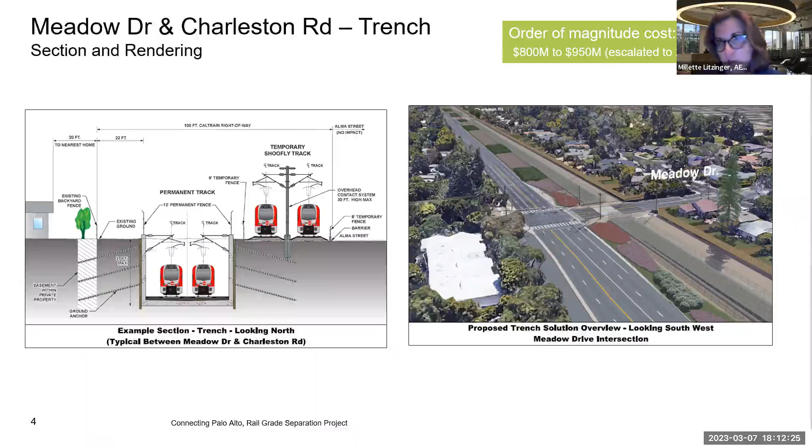You can see that in the rendering on the right side of the page. Because of those ground anchors for the retaining walls, the landscaping modeled in this area depicts plants with shallow roots, since we couldn't put trees in that area due to the ground anchors. The order of magnitude cost for the trench is $800 to $950 million, in 2025 dollars. The next slide is the same rendering looking south towards Meadow Drive, just at a larger scale so you can see more detail.

Did you say 950 million? Yes, that was the high end of our range of costs. Okay, thank you.

Let's move on to the hybrid. Hybrid is a term we use to indicate when a railroad is partially raised and the roadway is partially lowered. The railroad tracks will be approximately 15 feet above Meadow and Charleston, while Meadow and Charleston will be lowered about 6 feet. The railroad will begin rising near El Verano Avenue, remain raised over Meadow and Charleston, and return to the existing track elevation north of Verney Avenue.

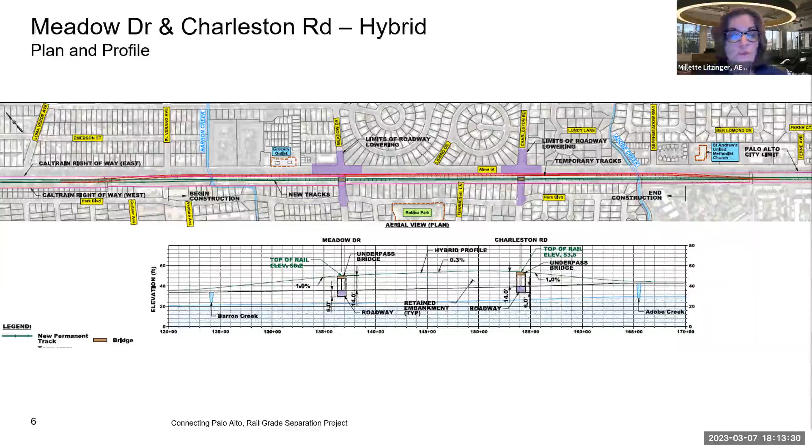Will the high-speed rail be compatible with that, raising it? Yes, high-speed rail can go on an elevated structure as well as a lowered one.

This next slide is a plan view of what would specifically happen at Meadow Drive. In the interest of keeping our presentation short tonight, I'm just talking about what happens at Meadow - there would be similar impacts at Charleston. In this exhibit, Meadow runs up and down, and the purple indicates areas where the streets will be lowered. Meadow will be lowered roughly between Park Boulevard and east of Alma Street, and Alma Street will also need to be lowered. The impacts outlined for Meadow Drive are very similar for Charleston Road - the lowering of both is approximately 6 feet.

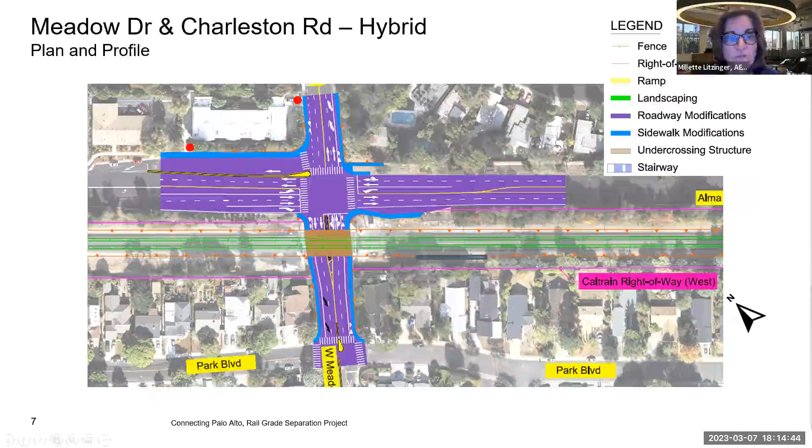We'll move on to the section drawing and rendering. This is a sample cross section between Meadow and Charleston looking north. The track is slightly elevated, and we show the temporary track required to provide Caltrain service during construction.

In the rendering on the right side, the tracks are partially elevated and the roadway is partially lowered. This rendering of Charleston Road illustrates the retaining wall to elevate the railroad and lower Charleston as well as Alma. Both would have to be lowered to some extent to get underneath the railroad tracks. Is it very similar to Fifth Avenue in Redwood City?

Fifth Avenue in Redwood City - yeah, it would be somewhat similar. Fifth Avenue, I think, is a fully lowered road, so it'd be similar, but not quite the same. Maybe a better example would be in San Carlos, some of those up at Holly Street - probably more similar.

I don't understand where the shoofly tracks would go in any of these. Is there room for shoofly tracks? Yes, we have to put it on one side or the other of where it exists today, so we can build the new tracks near where they are now. It would take up a portion of Alma Street.

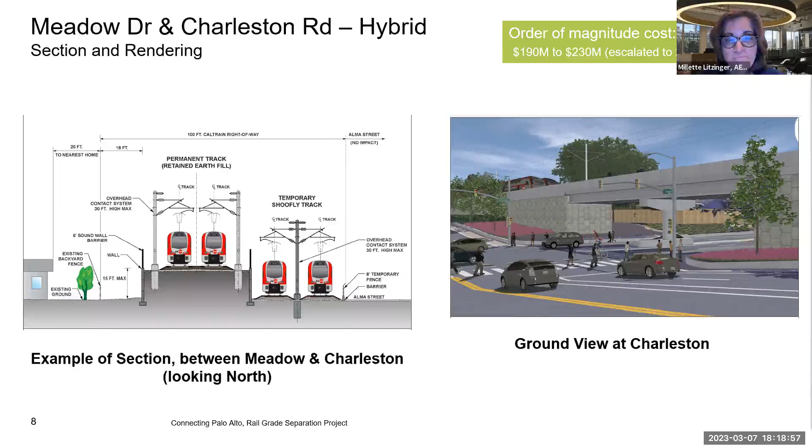I'll move on to the last alternative, the Meadow Drive underpass. In this alternative, the tracks in Alma Street remain at their existing elevation while Meadow is lowered just west of Park Boulevard to Emerson while passing under the tracks and Alma. There's a separated 20-foot wide two-way ped bike path on the south side of Meadow, shown in pink. Similar to the other alternatives, the purple area indicates where the roadway is being modified.

The bike path passes under the tracks and Alma, and there are crosswalks on Meadow provided at Second and Emerson.

There are some turning movements that won't be allowed with this alternative due to geometry restrictions. Vehicles on Meadow will not be able to access southbound Alma. Northbound vehicles on Alma can access Meadow, but they will have to travel about 600 feet north to Alma Village Circle to make a U-turn, then travel back south to make a left or right turn onto Meadow at the signalized T intersection in the underpass. Due to the proximity of Alma to the railroad, the U-turn radius is relatively tight and trucks would be prohibited from this movement.

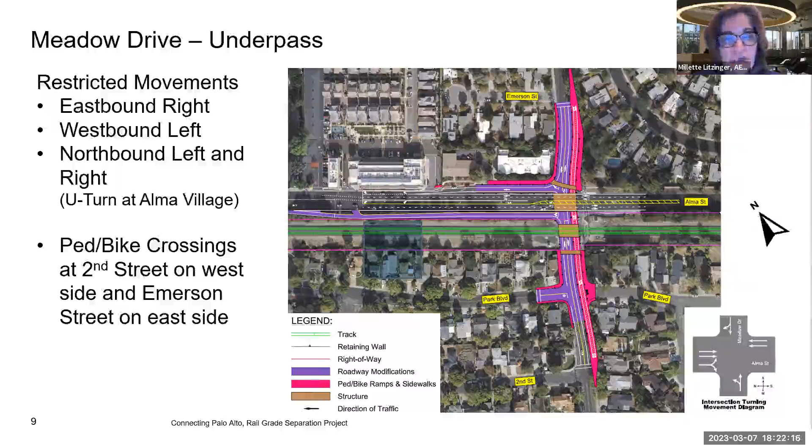I think let's move on then to the rendering here on the next slide. The image on the left is looking north along Alma towards Meadow. You can see the ramp connection from southbound Alma to Meadow, shown on the left side of Alma, and the ramp connection from Meadow to northbound Alma is shown on the right.

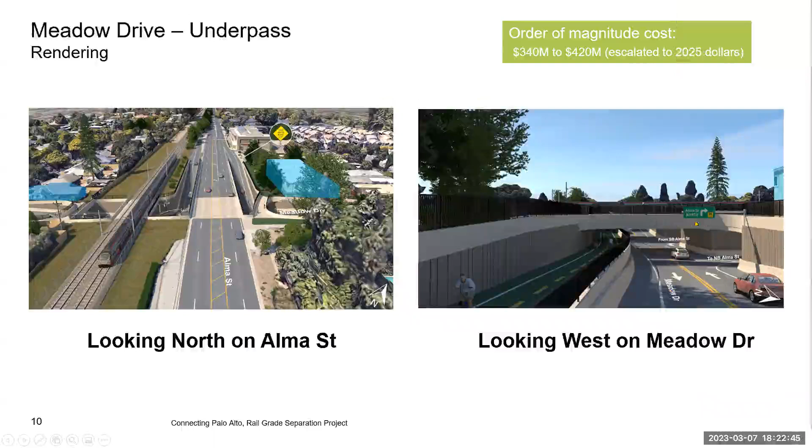The image on the right is looking west along Meadow. The separated bike path can be seen on the left behind the railing, and the right turn onto northbound Alma can be seen on the right side of this rendering.

The order of magnitude cost for the underpass is $340 to $420 million, in 2025.

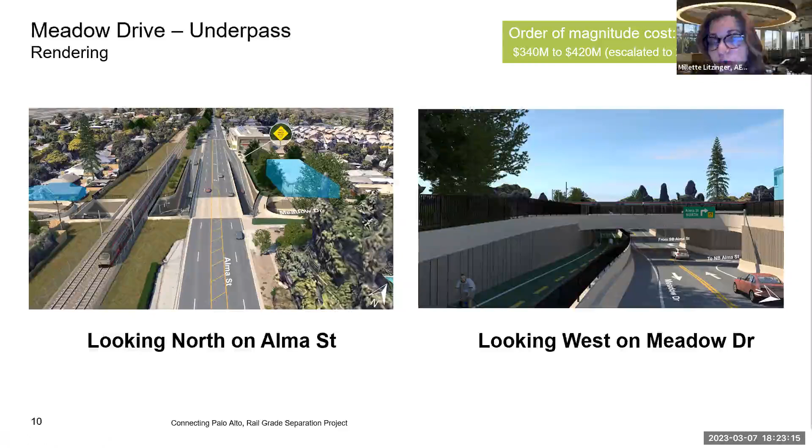And that's a different cost than the trench? Pardon me? That's a different cost than the trench? Yes, they all have different costs. Each alternative, trench, hybrid, and the underpass, are all different costs.

And is this underpass quote just for Meadow, or is that for the two of them? It's for the two of them. Okay, the cost is for both or individually? For both.

Okay, I think I'll pass it to Ripon then. So finally, right now the status is that we have narrowed down these alternatives to 3 alternatives in consideration for Meadow and Charleston, and that's hybrid, trench, and underpass alternatives. Our stakeholders, including our pedestrian and bike advisory committee, as well as school district and other stakeholders, have recommended us to look into some refinements and address some of these issues that they brought up to us.

So we are conducting some additional studies and refinements of the alternatives at this time, which would help the rail committee in narrowing further those alternatives for the selection of the preferred alternatives. Currently we are doing some additional geotechnical studies, some additional cost estimation, as well as some refinement of the alternatives to address bike and pedestrian movements and other concerns that were brought up from our stakeholders.

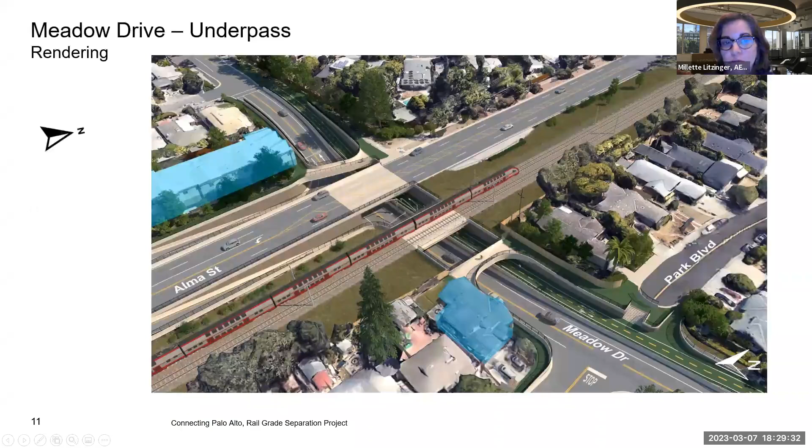Caltrain's minimum or maximum allowed grade is 1%, so that is what we generally try to follow, though the trench looks like it's 2%. Yes, it would require a design exception. We want to go back to that. Thanks, Peter. And that's assuming 110 miles an hour up the peninsula.

The high-speed rail, I think it might be more the freight that might have the problem with the 2% grade. Yes, it is generally that. So that's one of the many design criteria that we've identified as differentiators between the alternatives. For the trench, they would have to request an exception to the 2% grade, which could be challenging. You do have to show a significant hardship in order for Caltrain to consider it.

And it does take a while, so that's a challenge of this alternative. Some people would view that as a con, or it's a challenge you'd have to overcome to get this alternative approved. But 110 miles is the maximum speed. That's correct. Yes, go ahead, Peter. Yeah, the high-speed rail is designed for 110, that's correct.

Do you have any estimates of the duration of the construction projects to implement these three alternatives? Yes, we did, and I don't have those at my fingertips, but we have some really nice fact sheets for each of these alternatives on the Connecting Palo Alto website. It lists the approximate duration of construction for each of them. They're in the neighborhood of 1 to 3 years, depending on the alternative.

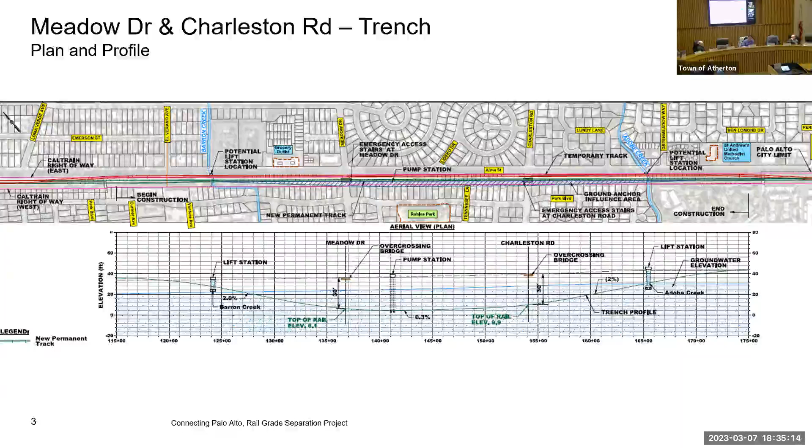Ripon, is there any decision for Palo Alto Avenue in terms of grade separating that, or is it still kind of waiting until the Palo Alto Council considers what to do around downtown? So currently the project is on hold for different reasons, including one being the downtown coordinated area plan. So at this time, that project is on hold.

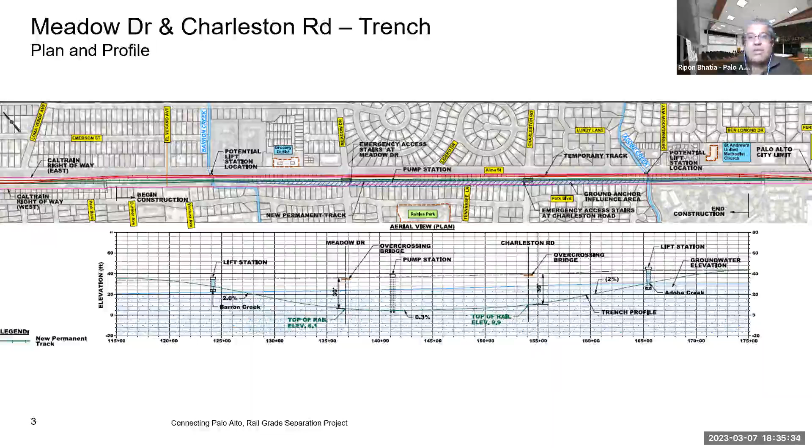Okay, can Millette mention the Menlo Park crossings, or were you planning on doing that, Millette? Well, I was planning on doing that. But Peter is probably better, since I think Peter is the consultant at AECOM for Menlo Park's rail plans. But I'm not sure if it's fair to ask Peter to present that since we didn't prepare him for it. But I can give a summary if Peter's willing to stay around - I'll move that item to the next one. Why don't we move to public comment, since we're done with the questions.

So Mr. Brandt, did you have a comment or question? Yeah, I do. I just wanted to make some comments.

High Speed Rail Authority is planning to do quad gates on all 70 crossings between Gilroy and San Francisco. As you in Atherton know, that's often a prerequisite for doing a quiet zone anyway. High Speed Rail Authority is supportive of quiet zones, but it's up to each individual jurisdiction to take the initiative and carry that process through, as I believe you all also know.

The other comment I'd make about these grade separations in general is that dipping or lowering roads is, I think, really folly. It's enormously disruptive, with massive utility relocations. Even the project recently completed in San Mateo ran into major delays with utilities and coordination with PG&E, with major cost overruns. So it's something really to be avoided.